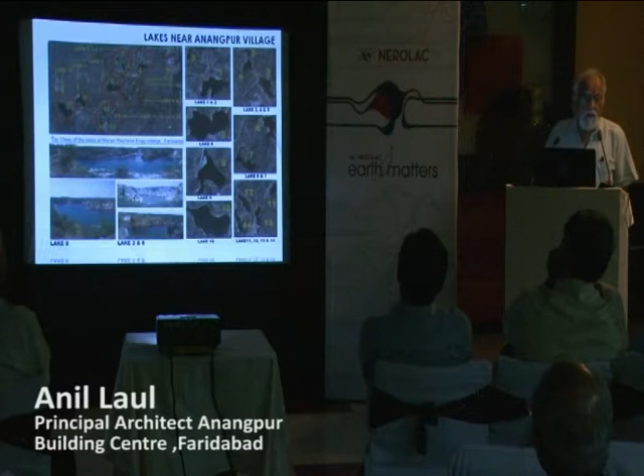Now those are the close-ups of the same lakes, crystal clear blue water lake. You don't even have to filter it. So what we did earlier is we built on highland. We separated the kitchen bath waste from the sewage, allowed it to a leach pit, and we dug wells on top of the hill. We took water from on top of the hill.

If you go to a village today, even a villager has more sense than our town planner.

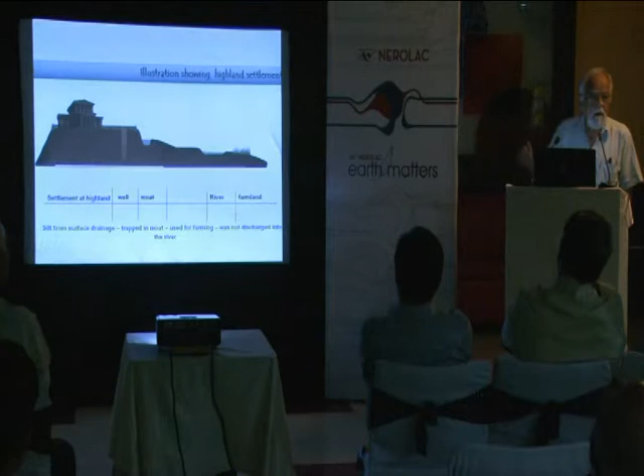Are they stupid? Why does the Thakur's well always have to be on top? Why is the Thakur on top of the tila? They don't build on flat land. The Shudras, this thing was not taken from the pond, but it was taken from a well next to the pond. That's what we are illustrating here.

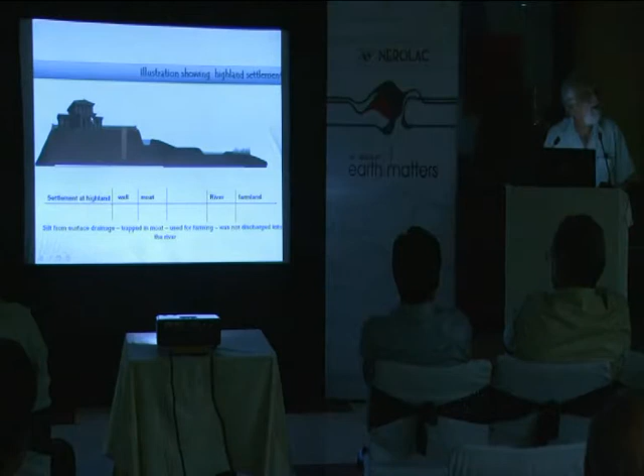So just put it off. Put off the light also. Put off the fan, not the light, the fan.

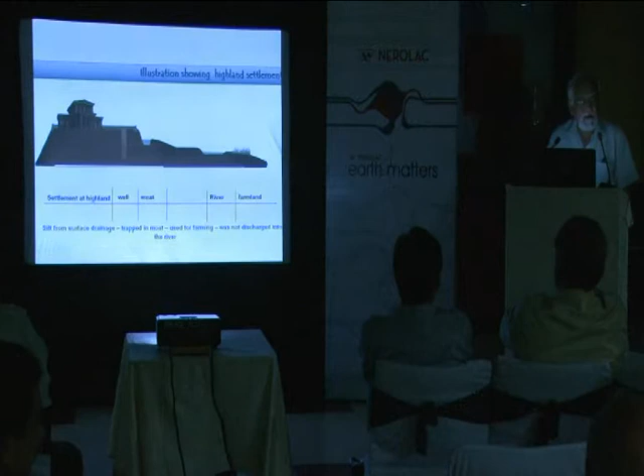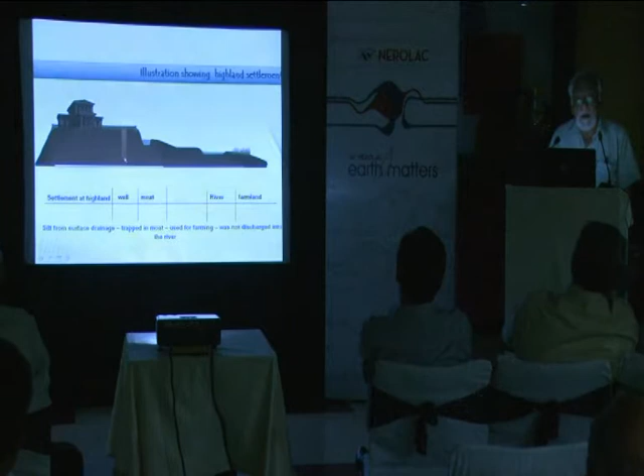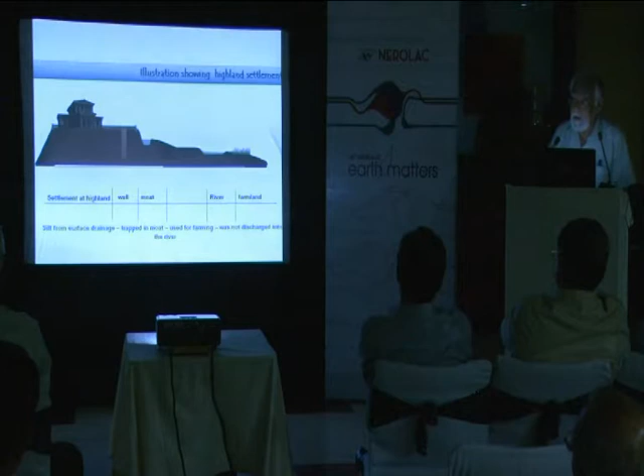So you allowed the kitchen bath waste to come into a moat. It got sunned, it fed the basin, and the basin recharged the well, and you picked up the water through the Persian wheel, and you got water which is mineralized through the earth. It was a constant system of water flow. That's how you had it.

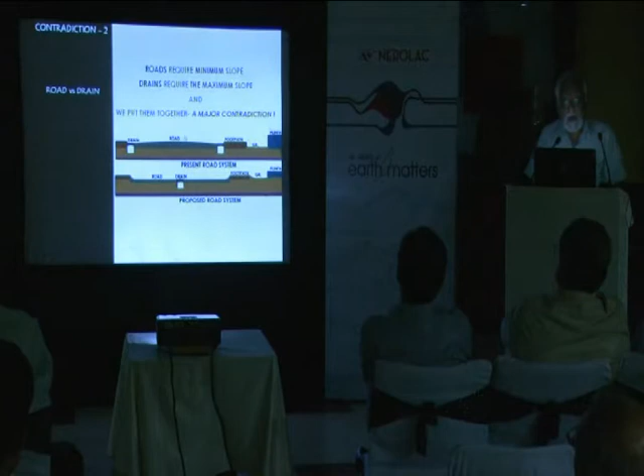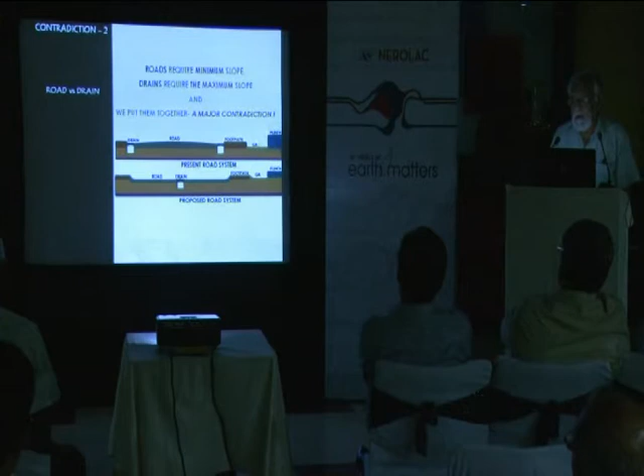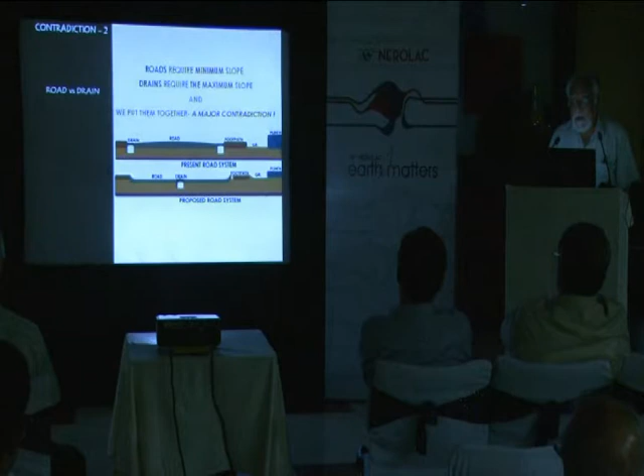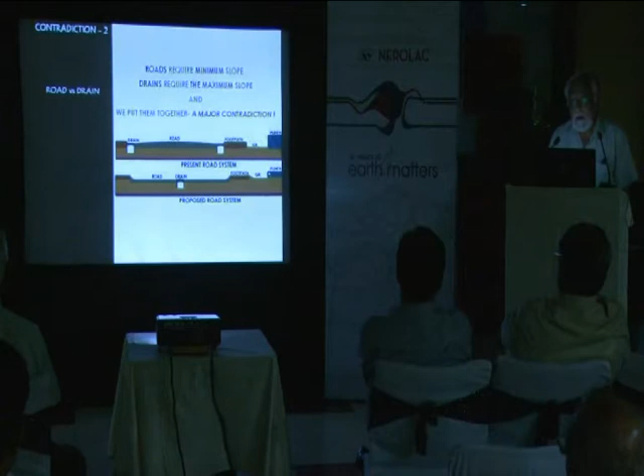But if you see the Roman roads and the British roads and the German roads, you'll find that the roads have the drain in the center. So you have lesser plinth to build and lesser chances of flooding. You give that camber because you think that everything is a highway, but the city road is not a highway. So you don't have to give that camber. You give that camber only of 1 in 20 to be able to take the water into the drain.

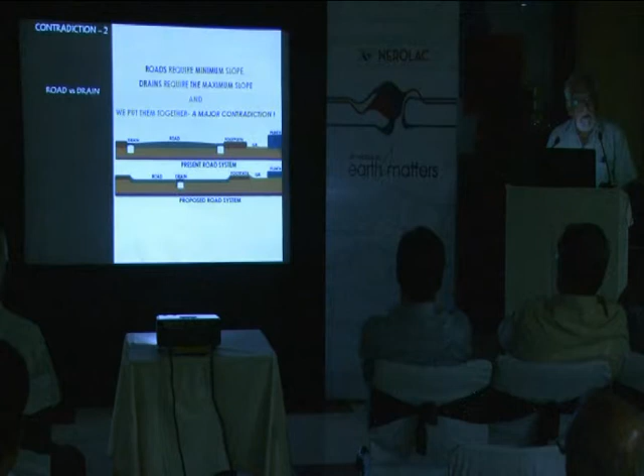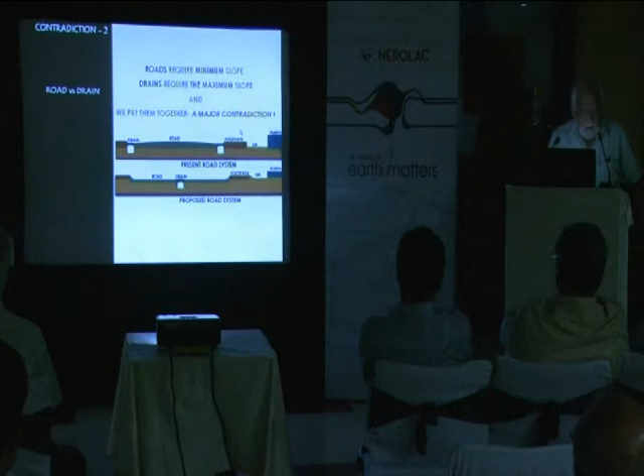What was the point I'm going to make? I'm sorry, I lost track somewhere. Let me have a sip of water, I'll get my memory back. Yeah.

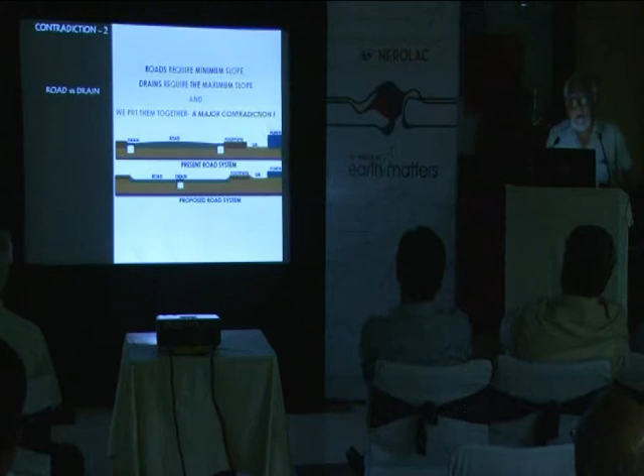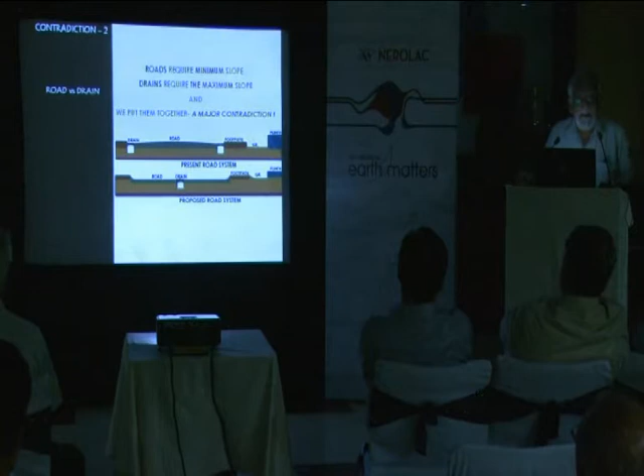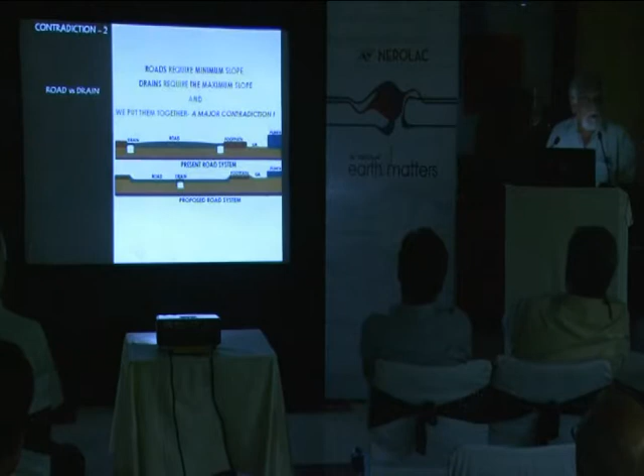I don't know how many of you have seen that movie of Aishwarya Rai dancing in Rome. You know, Aishwarya Rai is very pretty, she dances brilliantly. But look at the road she is dancing on. You see that? The drain is in the center. So next time you go see that movie, don't look at Aishwarya Rai. Look at the road, brother. In the movie there's more than Aishwarya Rai to see. And they always did this.

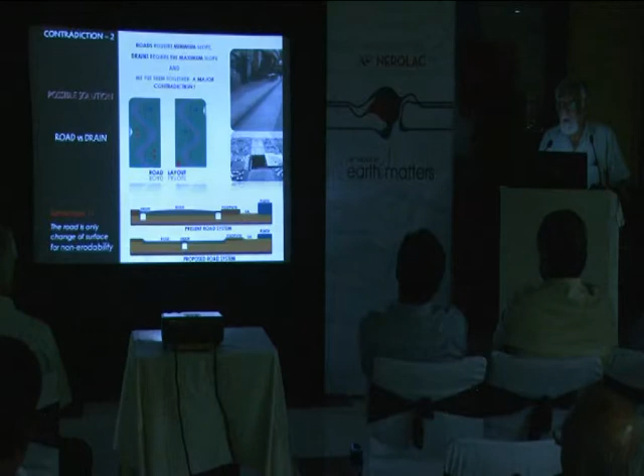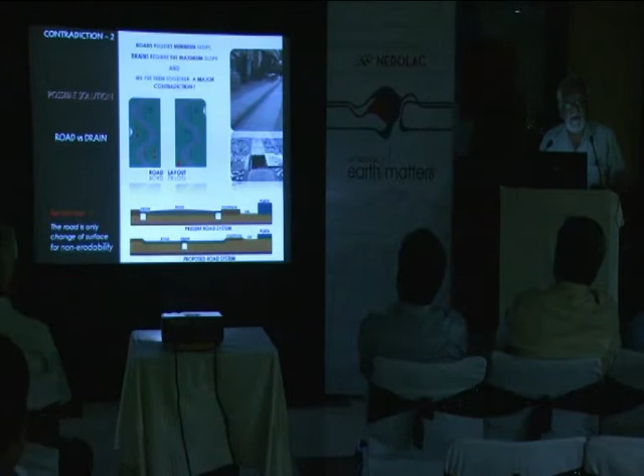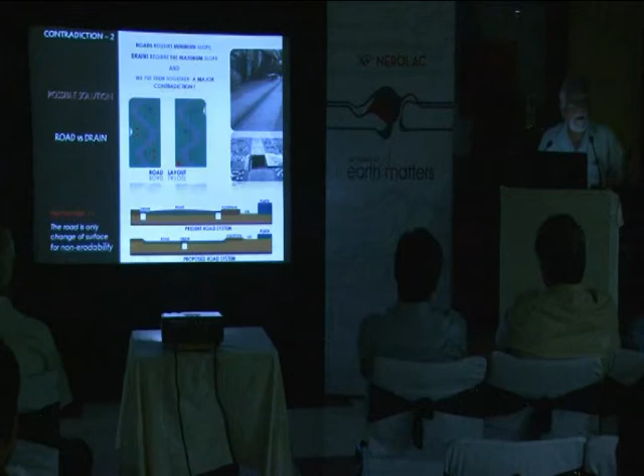We build roads as the straight path. A road is not the primary consideration. What you do is build the drains. You build around the drainage system and the disposal of waste. One question I ask the planners very often is, you know that a road requires a minimum slope. Do we agree? Anybody disagree with that? No.

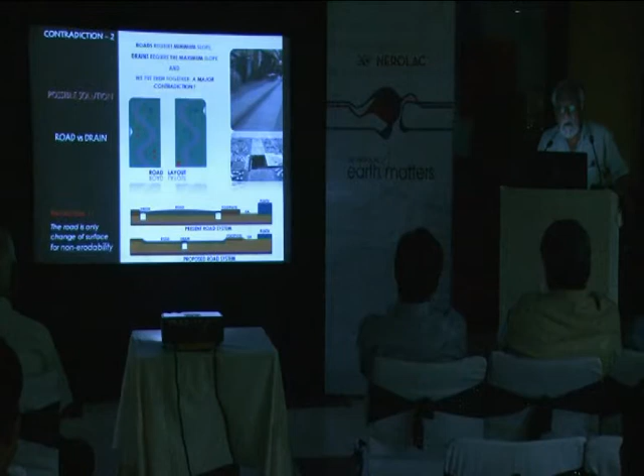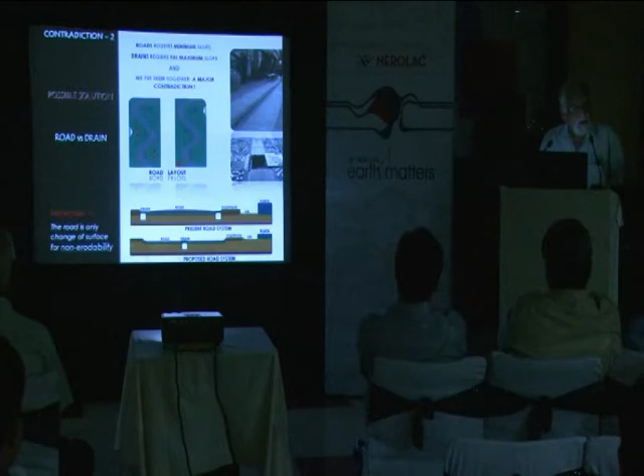You know a drain requires the maximum slope. Do you disagree with that? No. Why do you put the drain on the side of the road? Can it work? But that's precisely what we do. Then we say the flood came, this happened, that happened. A road is subservient to the drainage system. The drainage system feeds the groundwater recharge.

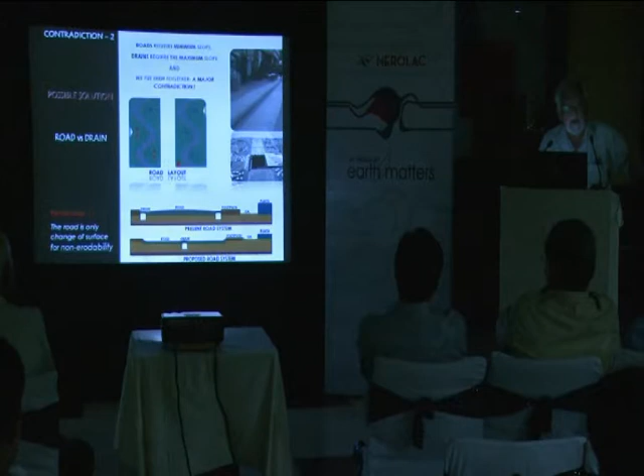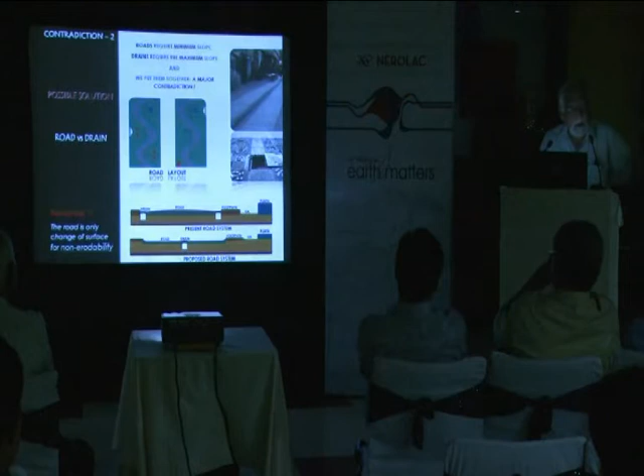And you don't take stormwater drains, which I'll prove to you right at the end, and feed it in the Yamuna and in the Bay of Bengal and then cause silting and then talk about global warming, what Pachauri and Al Gore are talking about, making an ass of everybody in the world. That I'll come to right at the end in my conclusion, if there is time.

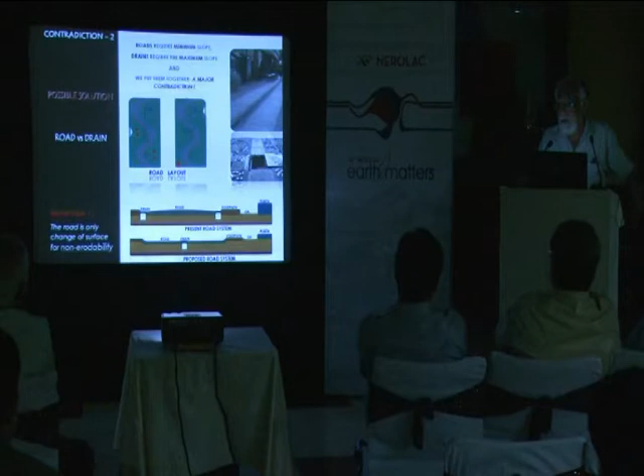So you take away the sewage. When you see a doggy does his poo, with his back legs he throws mud on it. What does he do? He dries his poo as fast as possible. So is there a lesson to be learned from the doggy?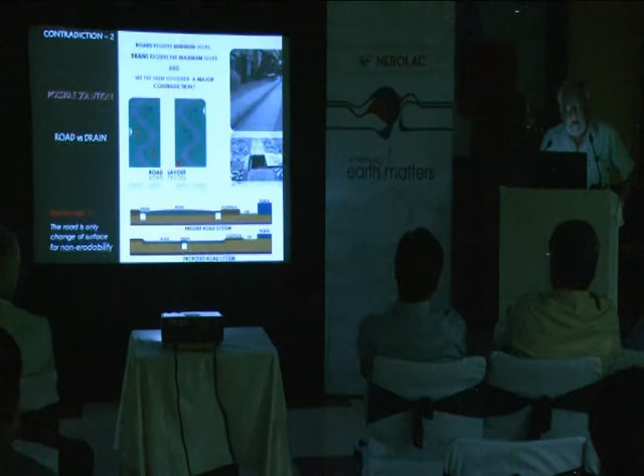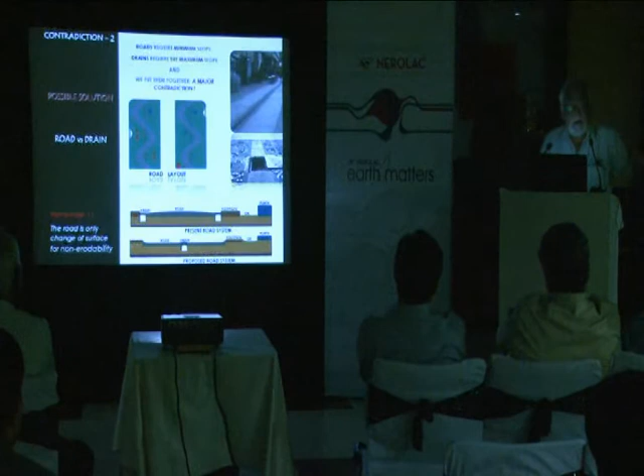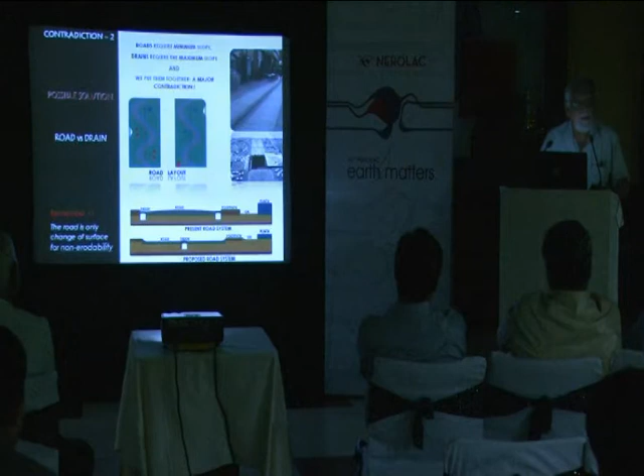So what you do is take away the excess water from the sewage treatment plant by separating the kitchen and bath waste from the sewage. In your system you have the kitchen bath waste and the sewage pipe. Two separate pipes come out, and you put them in the same damn manhole. Why? Because you have to create self-cleansing velocity, because you got to take the sewage to the sewage treatment plant, which is also at zero level, so you are adding more water.

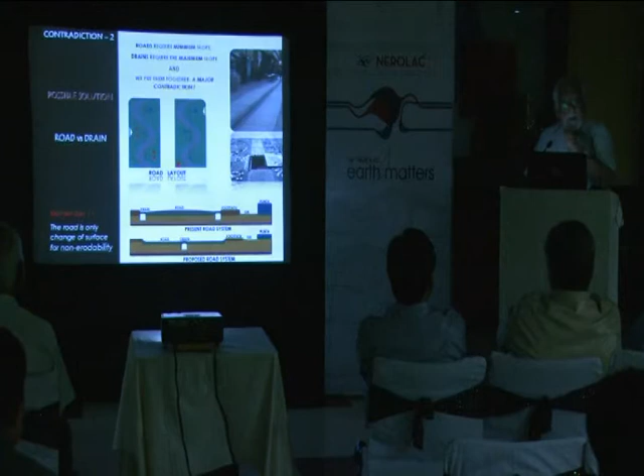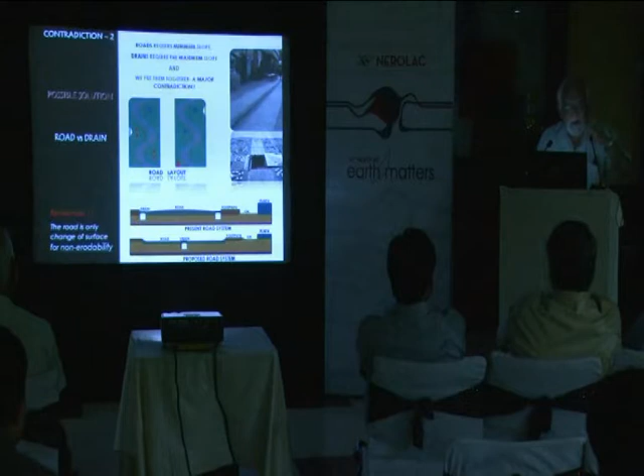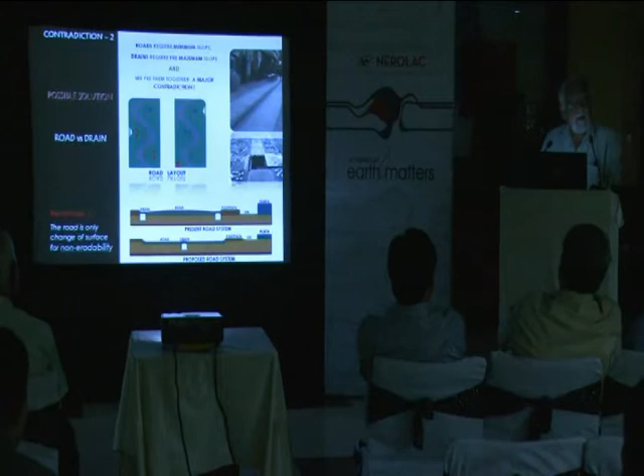You go to the sewage treatment plant wala and say, give me more biogas, he says, give me less water. But you give him more water because you have to create the self-cleansing velocity. But building on the highland, then you would have had this little self-cleansing velocity. You could have separated the kitchen bath waste from the sewage. The sewage has very little. You have 100 grams. If you are very strong, you might poo out 150 grams of poo.

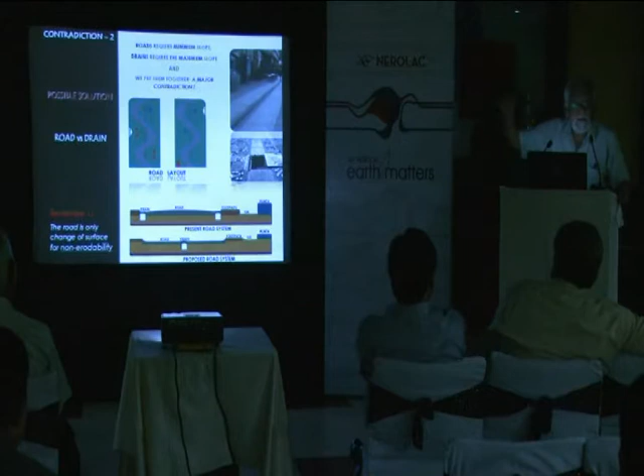Dry. And you put 20 liters of water to go with it. For 150 grams of poo, 20 liters of water. How did that happen? I'll come to that part. Now I'll give you another contradiction.

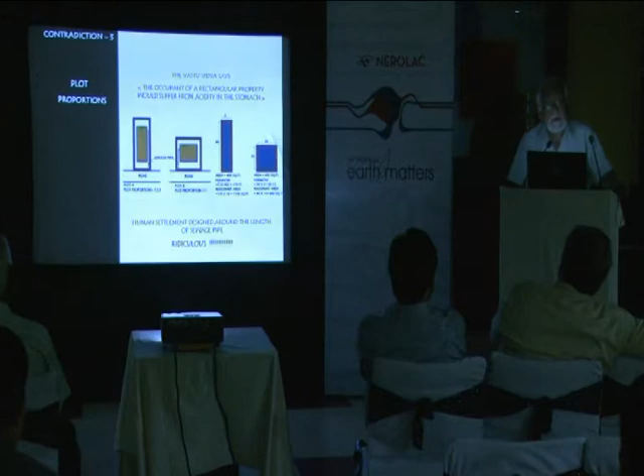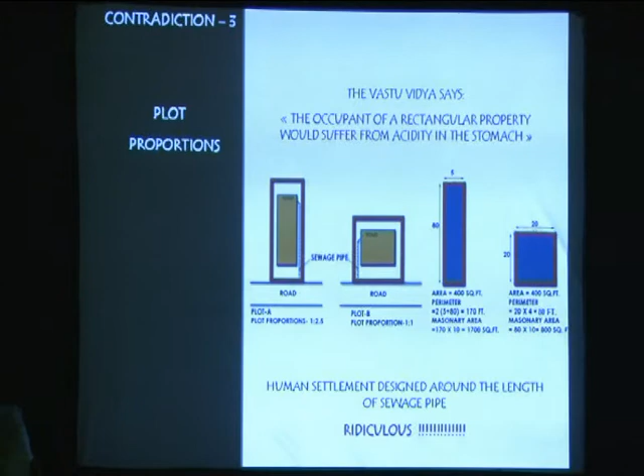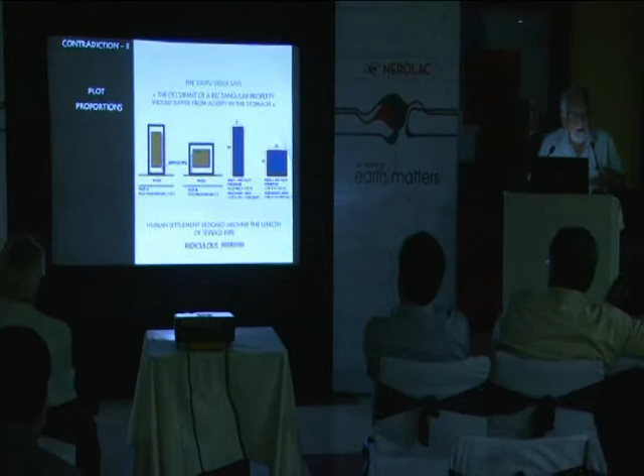Take our famous town planners. All colonies are developed with a proportion of 1:2.5. Right? Most economical. Again, you've taken your decision around the length of a sewage pipe. Development cost is lower. The sewage pipe is dictating how you and I are going to live. Am I willing to believe that we have never thought beyond that? And then also when you do a rectangular plot, you've added so much pipe back. If I have a square plot, I've only got so much pipe. So I made an ass of somebody else. I solved no problem.

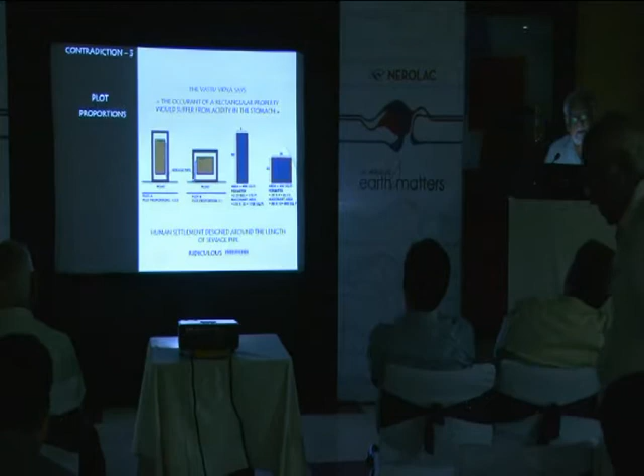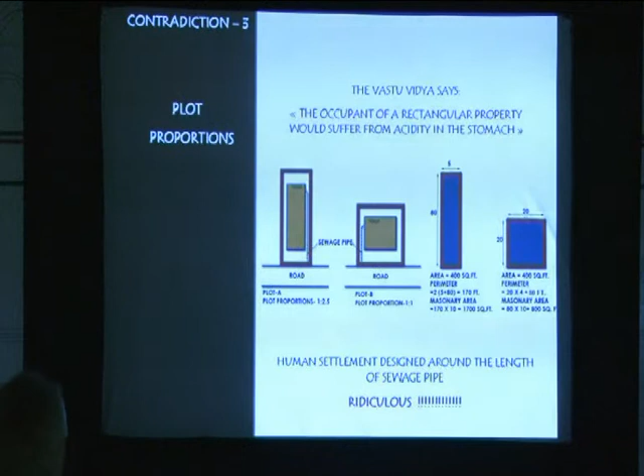That is why the Vastu Vidya says that you must have a square plot. They said if you have a rectangular plot, you will suffer from acid in the stomach. You will get ulcers in the stomach. And Vastu is not a magical thing. It's a system of bylaws which are far superior. But it is not a magical thing. So, let me give you an example. Why will I get acid? Now I will prove it to you mathematically.

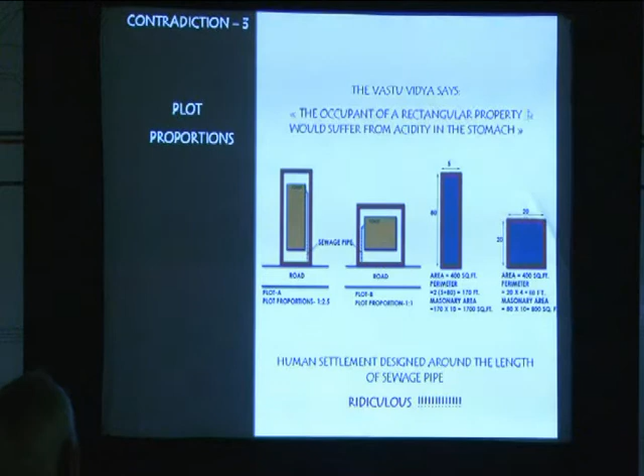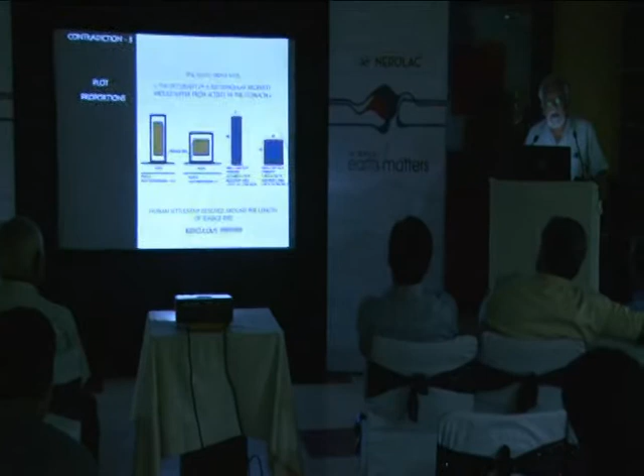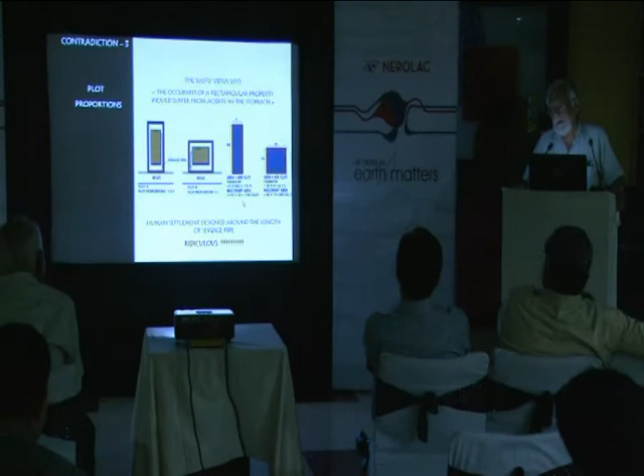I can take a room which is 400 square feet, which is 5 feet by 80 feet. That's 400 square feet. I can take it 20 feet by 20 feet, which is also 400 square feet. Calculate the perimeter. 80, 160 plus 10, 170. Multiply by 10, 1,700 square feet of masonry. 20, 40, 60, 80, 800 square feet of masonry. Now it makes sense. You got more heat intake. You've taken more resource. And then we talk about sustainable development, green buildings. The system of 1:2.5 is a British bylaw. They had to have more heat intake.

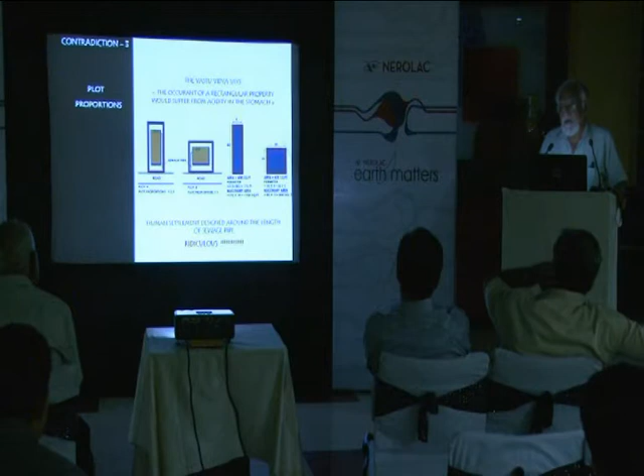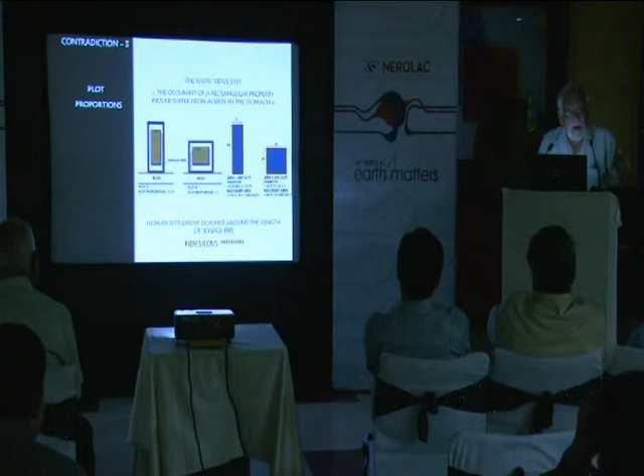And you know, the British bylaw today even says that all roofs in Kenya will be designed to take 6 feet of snow. For God's sake, it doesn't snow in Kenya. But the bylaw still remains. Takes you back to Uncle Macaulay, slide number 3 that I showed you. We are not willing to think anymore. So we took this further. I'll show you some projects we've done on this basis.

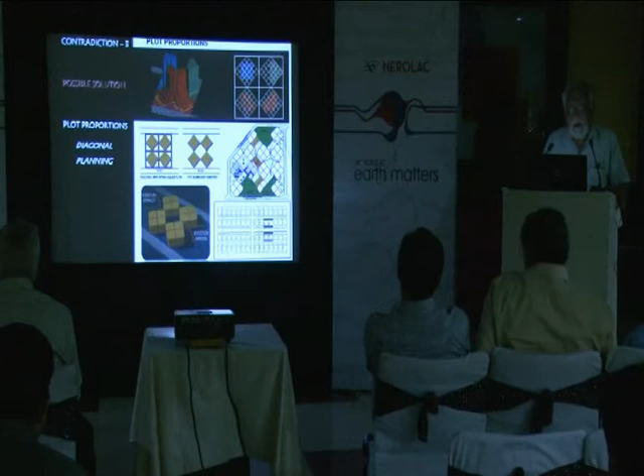So I said, okay, very good, we'll build square plots. People say it'll give you less density. I'll prove to you it'll give you the same density. In fact, more. So we said, instead of doing the conventional setback, front setback, back setback, side setback. Yahan patli si gali hai, and this guy is looking into this guy's window. This guy's son is eyeing this guy's daughter.

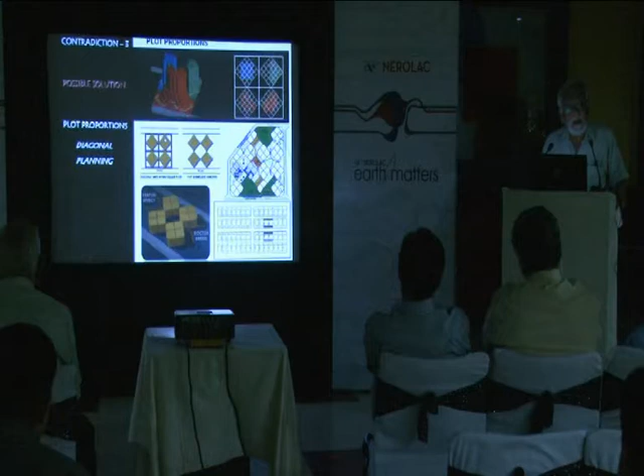Why are you looking into the guy's house?

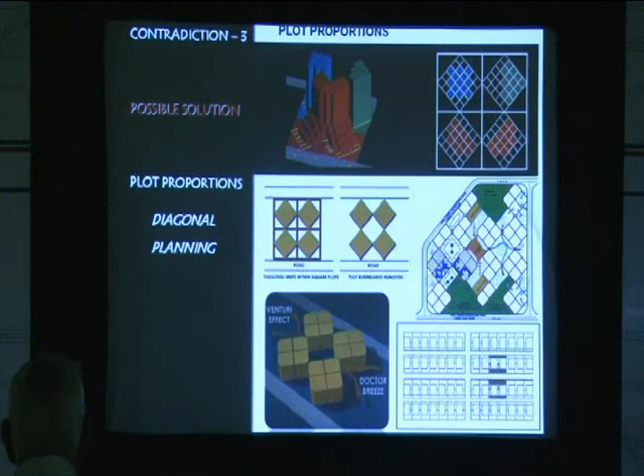Once I do that and I leave little gaps in between here, I separate the kitchen bath waste, I cut down my road lengths, I allow that to percolate here, and I take the sewage here, which are twin leach pits. Twin leach pits lined with limestone and coconut shell charcoal, which I'll show you filters. I'm drinking water through that system, which is being given the Grand Kyoto Prize, which I'll show you, a filter working exactly on the principles of what I'm showing you in a sewage. And I will show you the same results with the circulation.

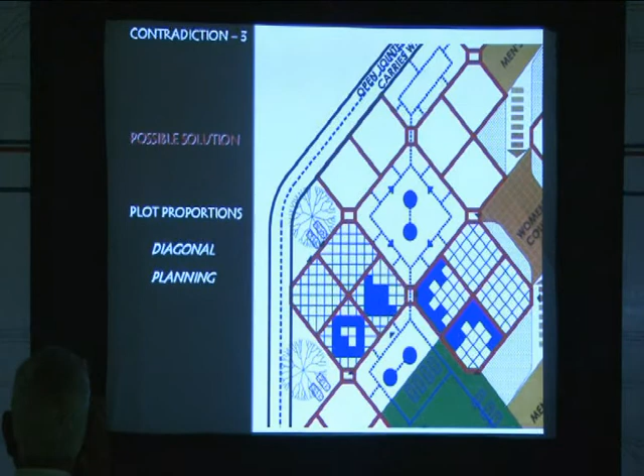Now, let's see the advantage of diagonal planning. I've taken the same plan. If you look very carefully, it's exactly the same plan here.

Can you give me a piece of paper that I can put under the mouse, so at least it doesn't irritate me. Yeah, little piece of paper. It requires a matte finish under it, then the mouse can run on it.

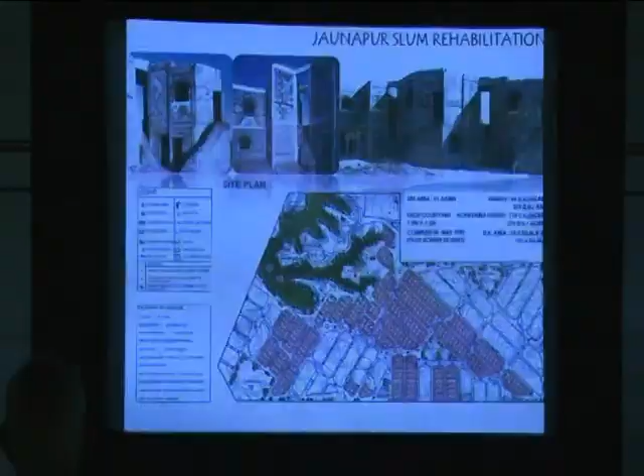I've got exactly. See, this is also at a very awkward place. You know, if this dais was in front, then I could use the pointer. I can't even use the pointer from this angle. Exactly the same density.

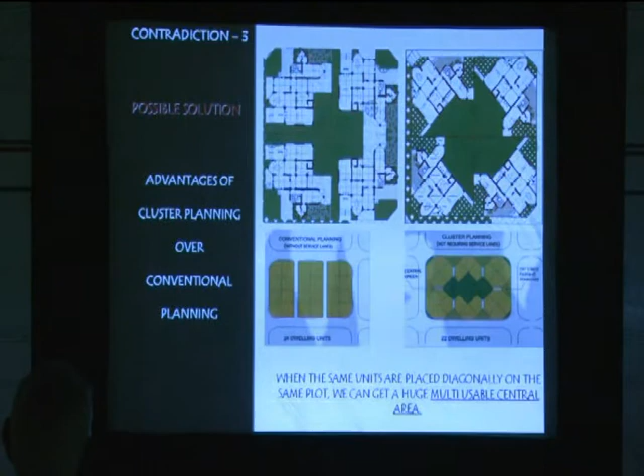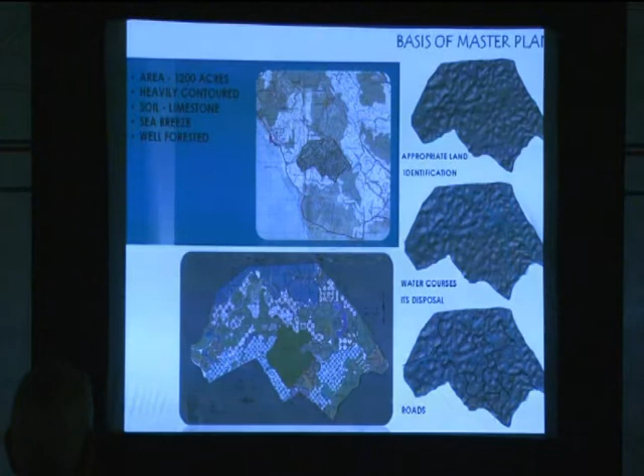This is a project we've done in Jamaica, over 1,200 acres. This is the only project in the world that got an environmental sanction, 1,200 acres. I defy anybody to show me a project over there. The Minister of Land and Environment is also the Prime Minister of Jamaica. So when I did this, they said, call this joker down here. So I went there and made a 5-hour presentation, only on one project. I'm going to take 1.5 hours on the entire lot, but that took 5 hours over there. And the same day, my client got a sanction.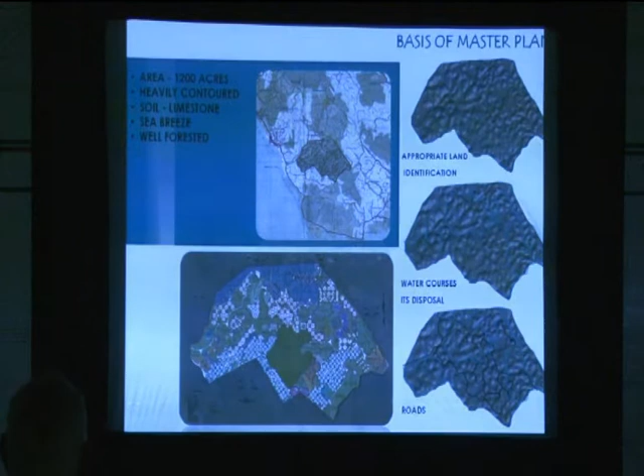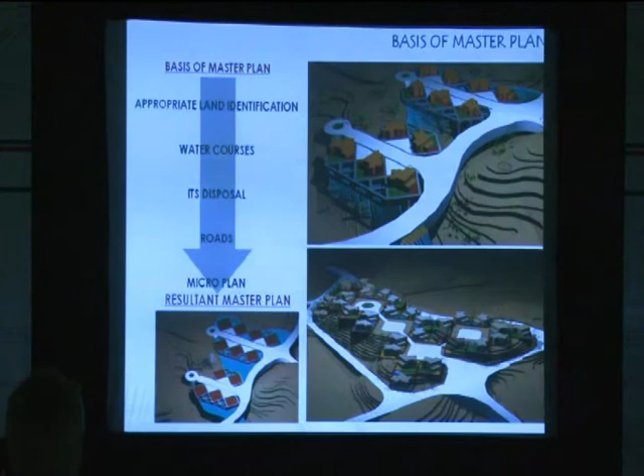But we did it on this basis, you know, this is the kind of land where we did the road, the water supply, the drainage, the water supply systems, and we got a plan like that. And it was given a sanction in 1 day. 1200 acres. But it's not difficult, because I've done it in Delhi also, 61 acres from the municipal corporation, rejected at 9:15 in the morning and re-sanctioned at 2:05 in the afternoon.

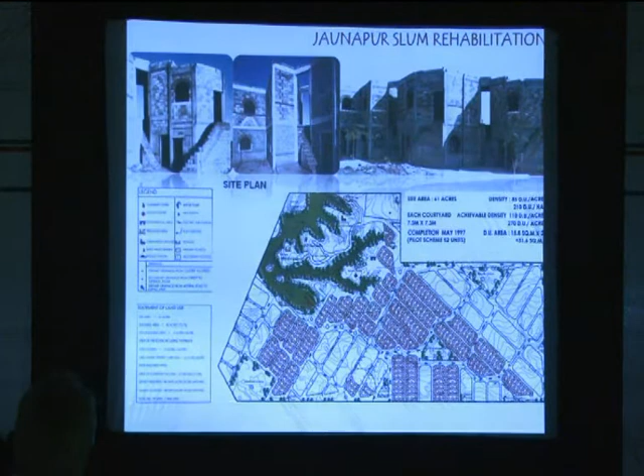Now, this system is not only applicable to the high-income group. This project exists in Delhi, ordered by the Supreme Court of India. The engineers are out to abort it, right? But these are the slums we do. And they're 60% of the conventional cost of the Public Works Department. Ordered by the Supreme Court, they made an ass of the Supreme Court. I told Justice Sabharwal on the 7th of December 2005, we had a major argument on this. And the Supreme Court heard only one case in the whole day, except a 10-minute miscellaneous matter. I had to fight that hard for it. But now it will come through again.

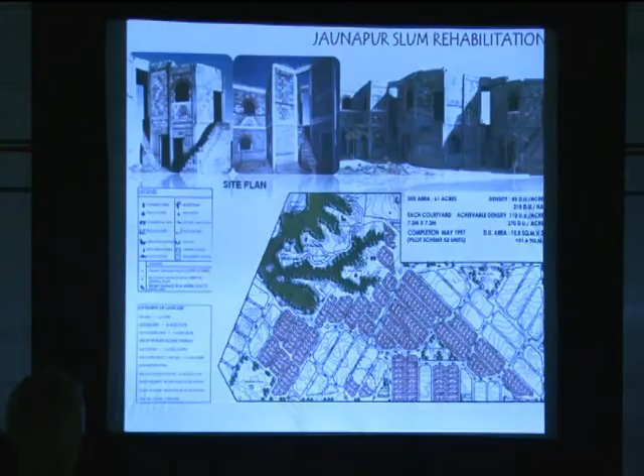But the system over here, whether I do it with the high-income group or the low-income group, is exactly the same. But they say slum people encroach. They don't encroach. You don't know how to plan. So what we did? They said we encroach. I said, okay, give them a ventilation, entry from there, ventilation from this side. This guy, entry from here, ventilation from that side. वो encroach करेगा तो वो मारेगा उसको. So you don't need the commissioner coming down for demolitions.

People can govern themselves. There is a very effective saying which says every action is best performed at the lowest level that it can be best performed. Let people look after themselves. You don't need the government babu there. And you get these huge courtyards. The JNURM today at 400 dwelling units per hectare is a consequence of this. They couldn't reach 200 dwelling units per hectare.

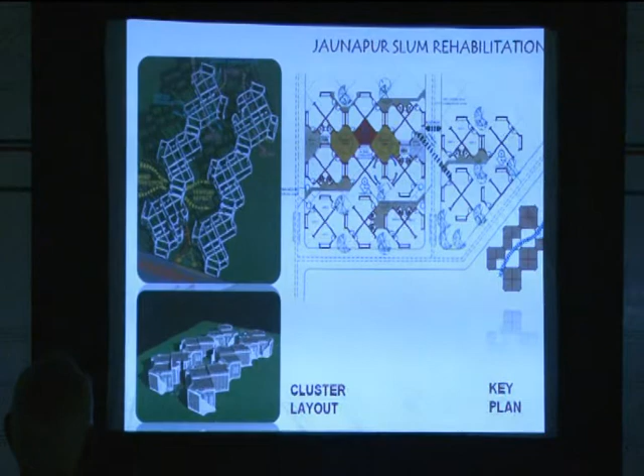By this planning system, we give them such handsome courtyards that the slum commissioner, Sahib Singh Verma, came down. He said, how can you give the slum dwellers a big courtyard? Sir, you are right. We will increase the density to 400. For a density of 200 dwelling units per hectare, you only require 7,000 acres of land in Delhi. And I pointed out that there's 701 square kilometers available. Over density बढ़ा दी. So you have JNURM now because some babu somewhere is not thinking. Those are also human beings.

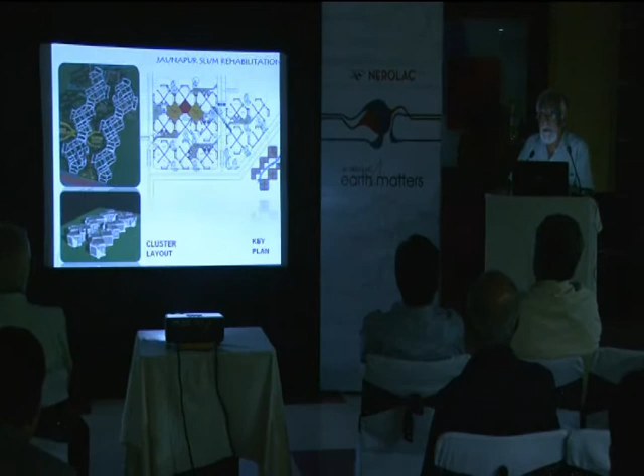These people can build another floor, but if you look, the other floor, you know, his entry is from here, the floor goes up from here, his staircase goes up from here. So when he wants to build the third floor, he can't because he's got to take support from this courtyard, but his entry is from this courtyard, he can't build the third floor. So my density won't increase.

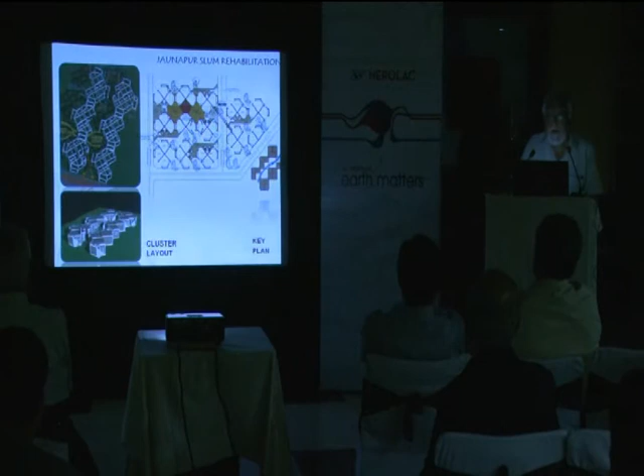This is a project done. 5 projects I've done in Delhi. For the past 21 years, I have still not been paid. But it can be done. It's a matter of defiance. As I said, I was born in a steel factory. So, you name the award, this project has got it. These buildings are 21 years old, what I'm showing you. I went down there after 21 years. This is now being given to a school.

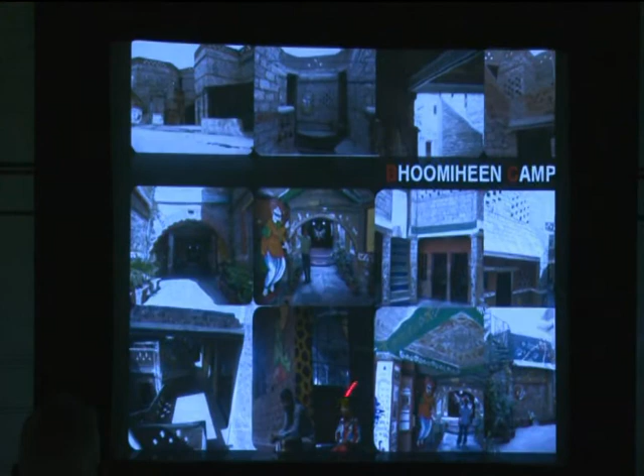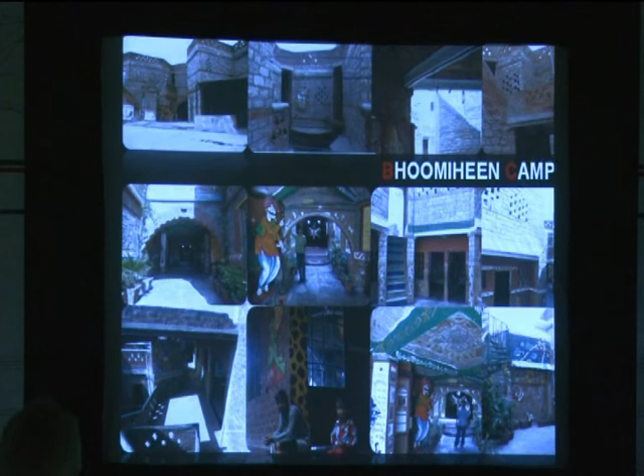This was designed for a density of 625 dwelling units per hectare, which at that point in time was higher than Dharavi, which was about 510, 520. They said that we can prove this system for 625 dwelling units, and this exists in Delhi. Now an institution called Katha is running there. They are running a school. The school, you know, you can change the psychology of a child, the color, the texture, these are all important things.

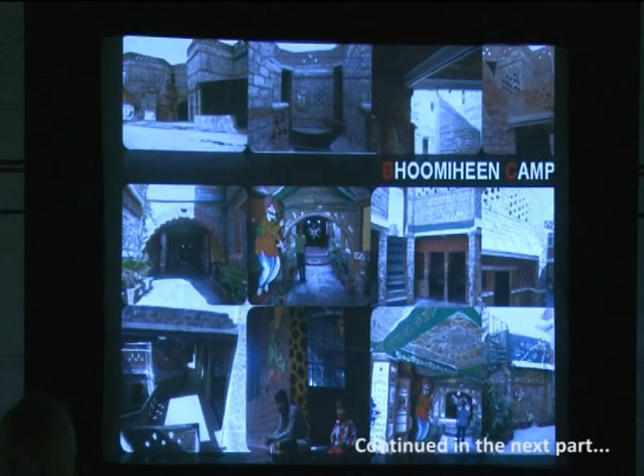Thank you for yawning, man in the pink shirt. I will cut it short if you're so bored already. I think it's time you had a drink.